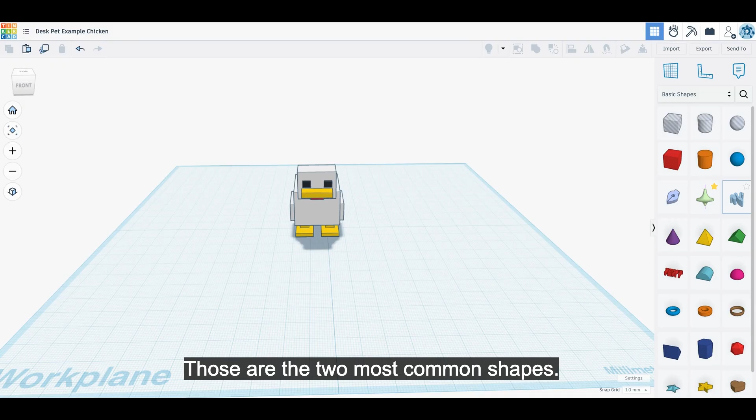I've had a few students pick other shapes from the menu and have to go back to either the sphere or the cube. But the goal of this project is to create an animal using only one shape. All you get to do is recolor and resize that shape.

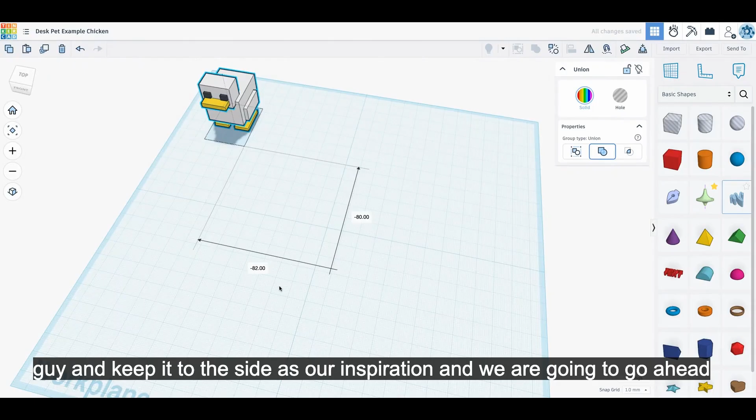And with the popularity of Minecraft and the Minecraft movie, obviously the chicken is an excellent choice for this project. So we're going to move this guy and keep it to the side as our inspiration, and we are going to go ahead and get started making our own.

Now, when we make our little desk pets here, I like to tell the students start at the bottom and work your way up. And don't forget to use things like duplicate object so that you can save yourself time in trying to make things symmetrical and perfect.

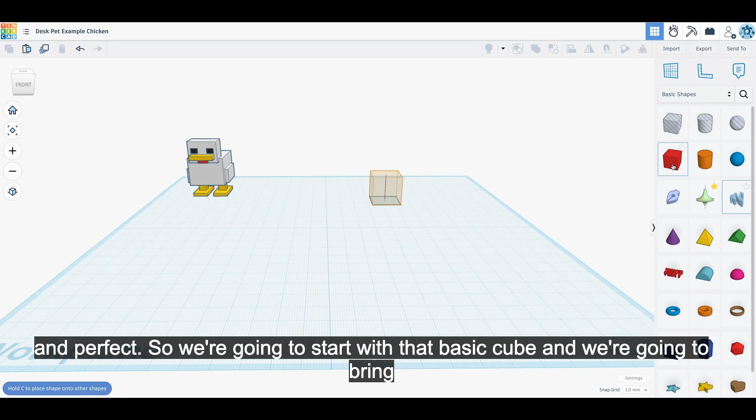So we're going to start with that basic cube and bring it on over, and we're just going to resize this. Let's make this 10 by 15, and we will make the height 2. You're not going to need much more than that. And we can make it a lovely shade of yellow.

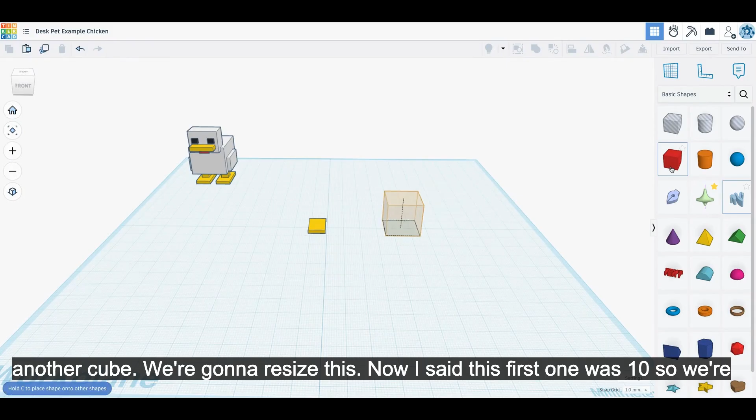Now I'm not going to duplicate this just yet because I do want to get that leg in there first. So we're going to grab another cube and resize this. Now I said this first one was 10, so we're going to make the leg 7 by 7.

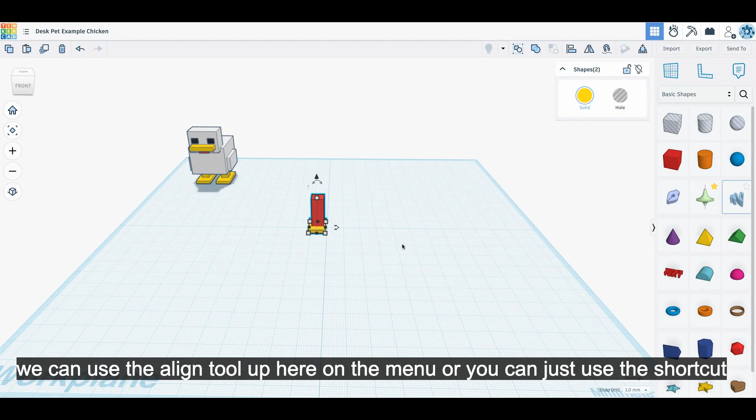And then we are going to go ahead and center these. Now, when we're aligning something, we can use the align tool up here on the menu, or you can just use the shortcut key L and it brings up your alignment tools. We're going to center, center. We are not going to use this Z center because we don't need a kneecap, we need a foot.

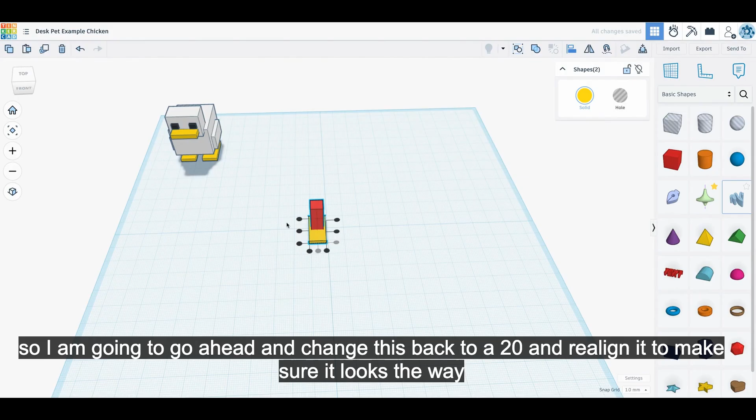We're going to double check sizes before we do anything else, and I think my foot is just a little too short for what I want it to be. So I am going to change this back to a 20 and realign it to make sure it looks the way that I want. This leg is a little chunky, so let's change those numbers to a 5. I think that's better. Realign it and make sure that I like it.

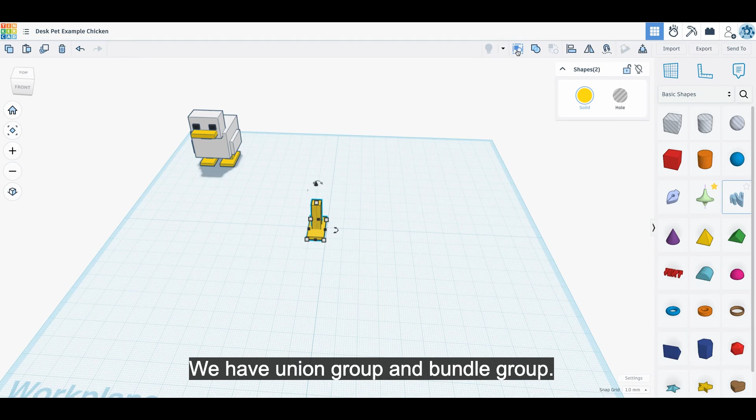Let's change that to a yellow as well, and let's go ahead and group this so that we don't mess things up. Now, we have two choices for grouping: union group and bundle group. Bundle group is kind of a temporary grouping. Union group means we want these to be one object. So we're going to union group this because the leg and the foot need to be one object. Okay, so they are now officially one thing.

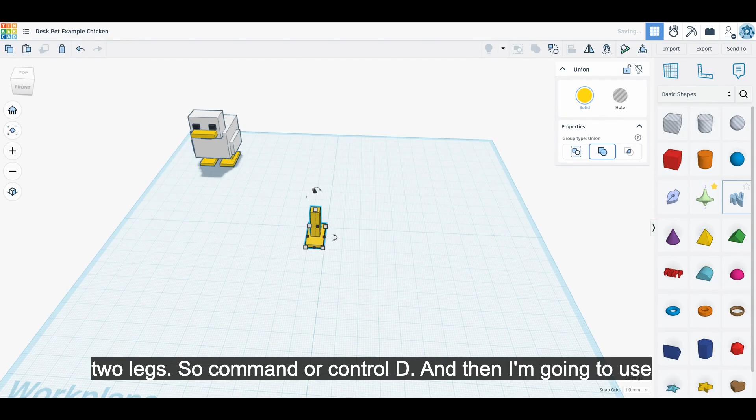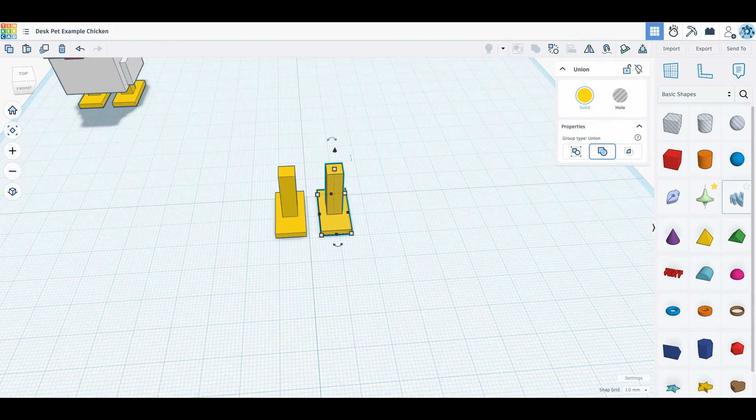I'm going to duplicate this because chickens have 2 legs, so Command or Control D, and then I'm going to use the arrow keys until they're right next to each other. Now I can tell that they're right next to each other because if they were overlapping, you would see that overlap right here in the middle. Once they're just touching, I'm going to check my snap grid. It says it's 1 millimeter. I want these 5 millimeters apart, so I'm going to tap my arrow key 5 times: 1, 2, 3, 4, 5. So there's 5 millimeters of space between the legs.

All right, I'm going to group these. Group. And now I have a pair of legs. I'm going to leave them tall like this because I want to make sure the legs are fully embedded inside my chicken. So the next step is to make that chicken body.

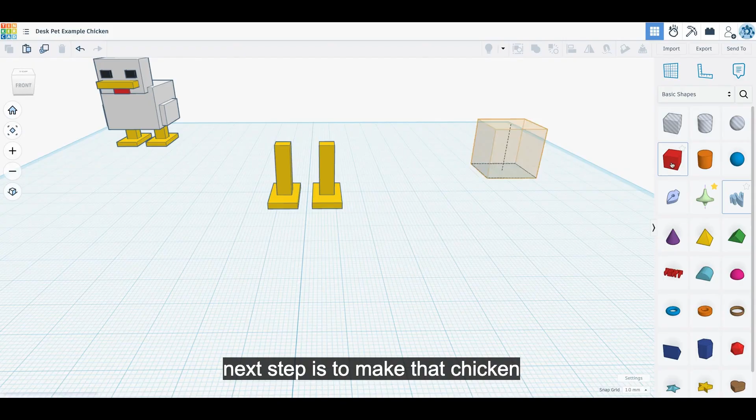New cube. Now, these are 20, so let's make this body 35, and we're going to keep it—now let's do 30. All right, and we're going to raise this 10 millimeters off the ground. 9, 10. And then let's go ahead and align these.

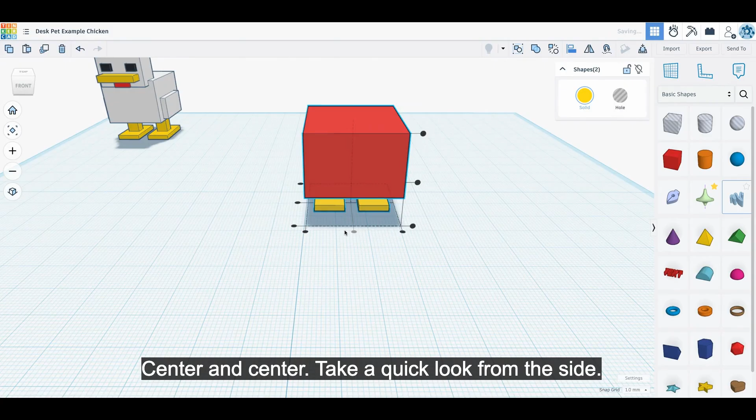Center and center. Take a quick look from the side. Looks pretty good. Now, let's see how I know that these legs are on the inside.

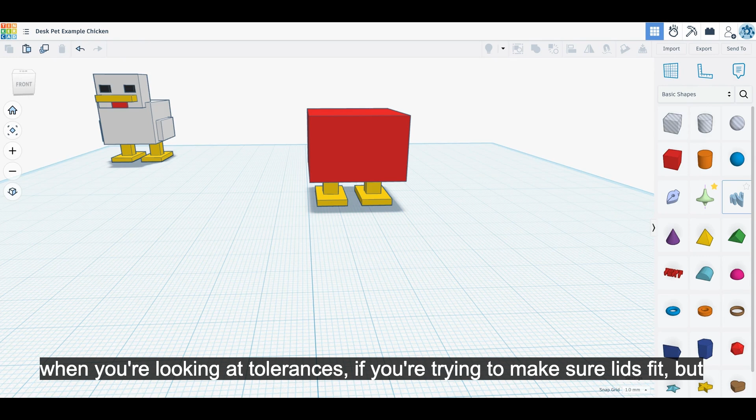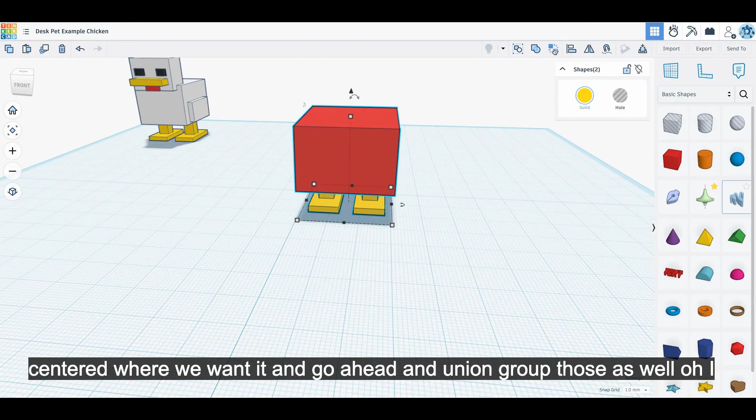There's a feature you can do called transparent, and what that does is turn a shape transparent so you can see through it. This comes in real handy when you're looking at tolerances, if you're trying to make sure lids fit, but I like to do it to make sure things are actually touching. So I'm going to click on my red cube here and tap the letter T for transparent, and here you can see that those legs are definitely inside the chicken body. Click it again, click T, and then make sure everything is still centered where we want it, and go ahead and union group those as well.

Oh, I forgot to change its color. So I'm going to click undo, click that red, and I'm going to change it to a white.

I do not want a red chicken. I want a white chicken. And then I'm going to group them together.

Now you'll notice that my legs have turned white, so I just need to go up here and turn on multicolor. And then that multicolor is back. You might have to do that step more than one time.

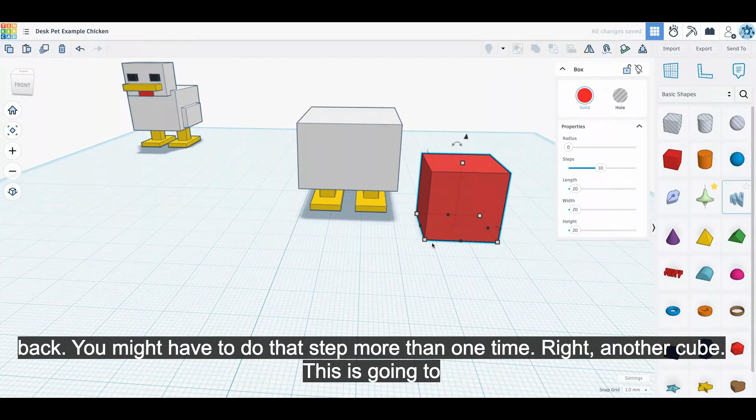All right, another cube. This is going to be for the wings, so we're going to need two of these. I'm going to get it in place and then show you a sneaky trick to make sure that it's right.

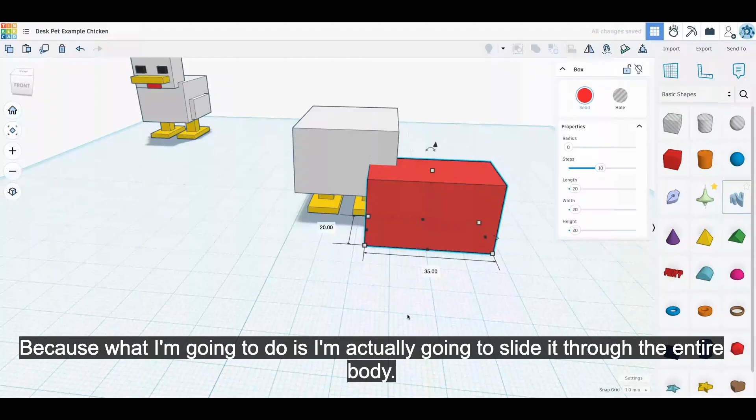So my chicken body is 30 across, right? I'm going to make this 35 across, because what I'm going to do is slide it through the entire body just to make it easier to make sure both sides look the same. I'm going to make it right now 10, and I'm going to change this one to 15 just to see how it looks.

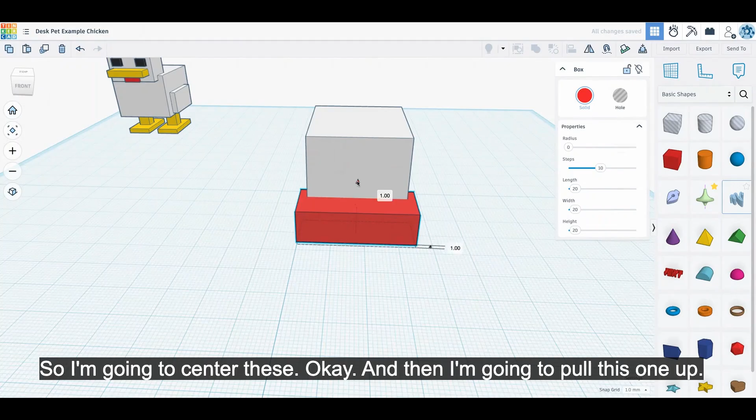So I'm going to center these. And then I'm going to pull this one up and push it. I'm using my arrow keys here because I'm trying to keep it really accurate.

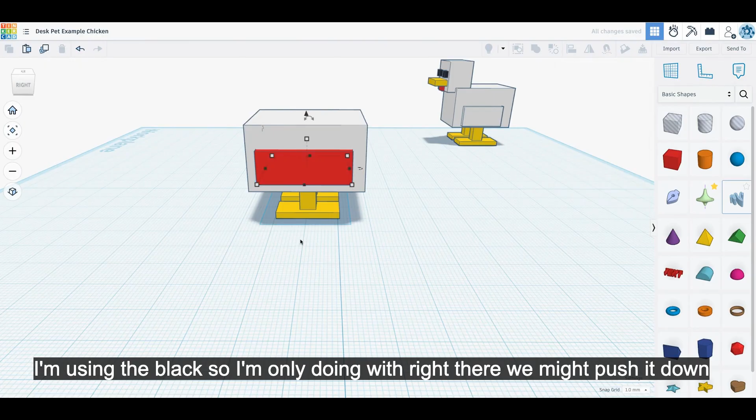Now, if you look at my original design, it's almost as long as the body. So I'm going to grab this and just pull it out a little bit. I'm using the black, so I'm only doing the width right there. I might push it down just a little bit.

And now it's the same on both sides, and I don't have to worry about duplicating anything or using the measuring tool. I just created the box to go all the way through so that everything is lined up the way it's supposed to be.

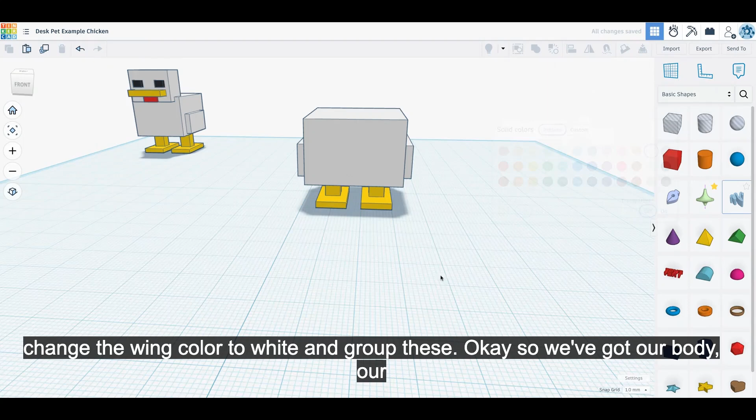I'm going to change the wing color to white and group these. Okay, so we've got our body, our legs, and our wings.

Next step, head. So we're going to grab another cube. I'm going to leave this one alone, I think, except to shrink it down a little bit. Let's make it 15, and then let's make this 15.

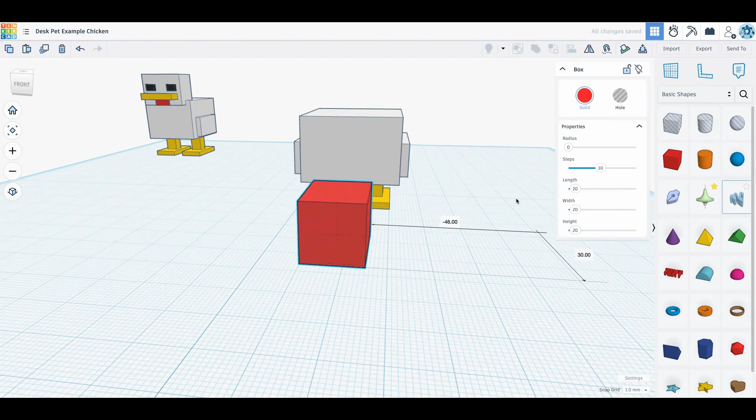All right, you know the drill, kind of smush it in a little bit. Notice that it's kind of smooshed in, and then we are going to lift it up until we get it where we like it. The important thing is to make sure that it's got some shoulder.

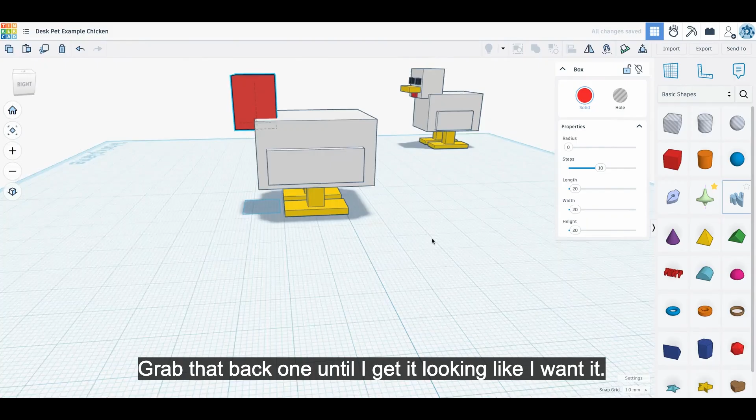Now, this is definitely way too wide. So I'm going to push it back a little bit, grab that back one till I get it looking like I want it. Oof, definitely needs to be wider.

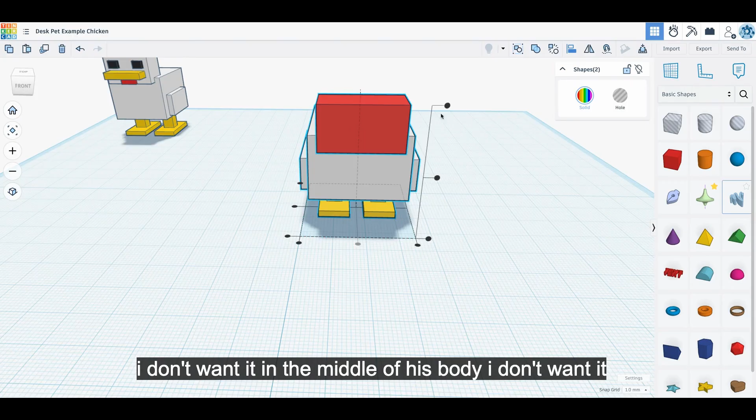I'm going to center it because the chicken's head needs to be centered, but I'm only going to use this centering dot in the front. I don't want it in the middle of his body. I don't want it, right? So we want it just right there.

And we want it sticking out a little bit. I like where that is. So again, change that color to white. And you'll notice that I'm grouping after every step. That is because I don't want to accidentally move something.

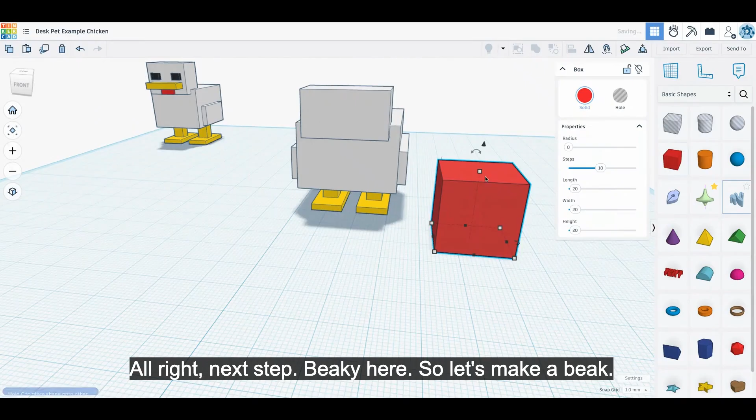All right, next step, beaky here. So let's make a beak. I'm gonna squish it down just a little bit, and squish it this way a little bit. Gonna lift it up, pull it over.

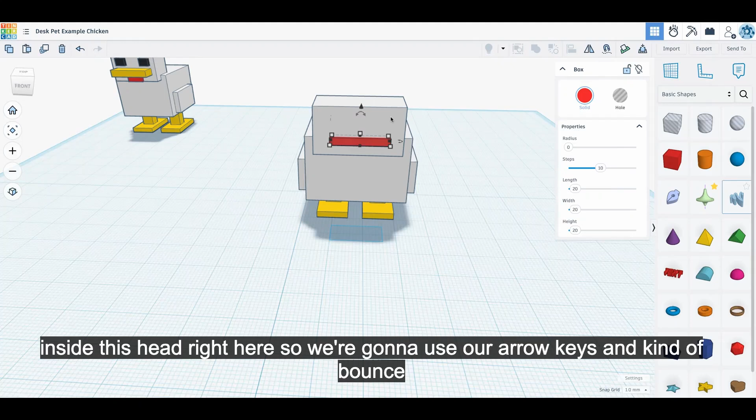Oh, do you see how it looks like you can't see it anymore? It's glitchy. That's because it's tucked inside this head right here. So we're gonna use our arrow keys and kind of bounce it out just a little bit, and then center it, just using this front center one.

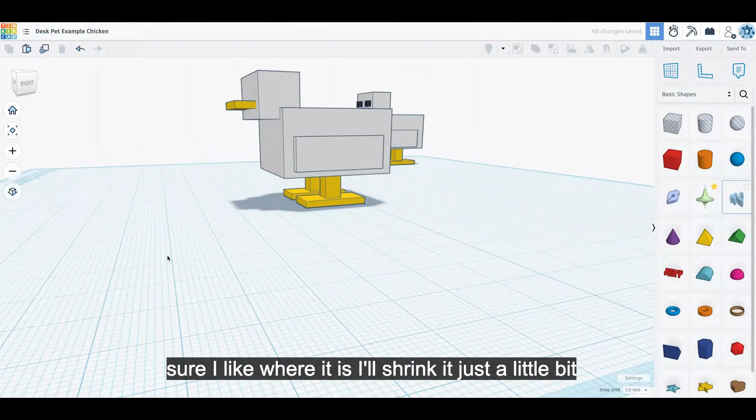Change the color to yellow. And before I group it, check it from the side to make sure I like where it is. Gonna shrink it just a little bit. There, kind of looks like it should. All right, group that.

Now it's got this weird red thing, the wattle, I believe is what it's called. It's just a tiny little cube. So I'm going to hold the shift key and click and drag so that it shrinks all the proportions at the same time, and just make a 5mm cube. Grab that triangle to bring it up.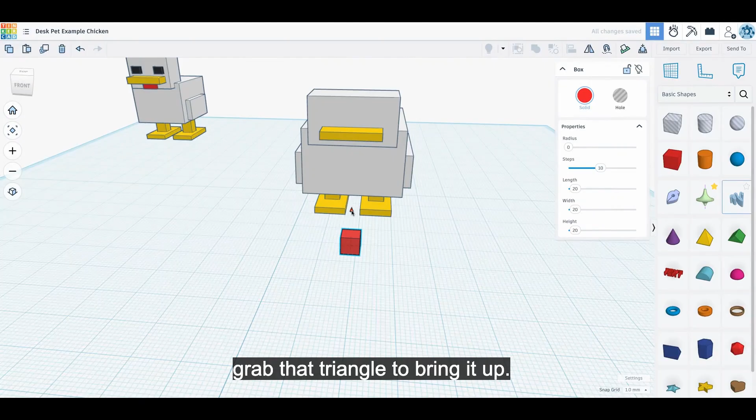And then I'm going to use my arrow keys to push it back. It's hanging out a little bit too much, not a big fan. Let's see if that looks like it's not centered, so doing our centering. There we go, looks pretty good.

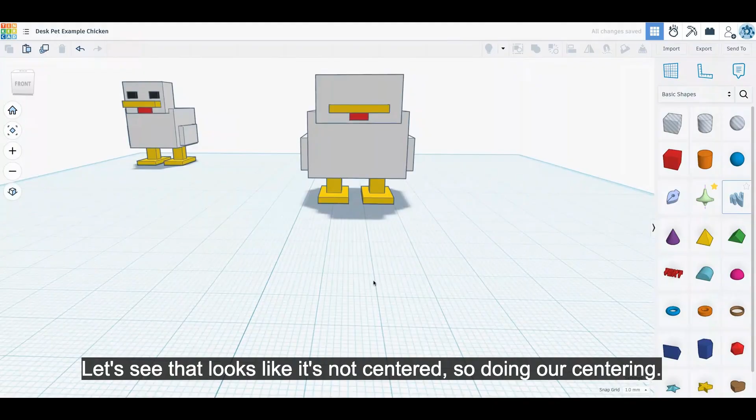Can't have a chicken without eyeballs. So hold that shift key, click the top one, pull it all the way down. Change that color to black.

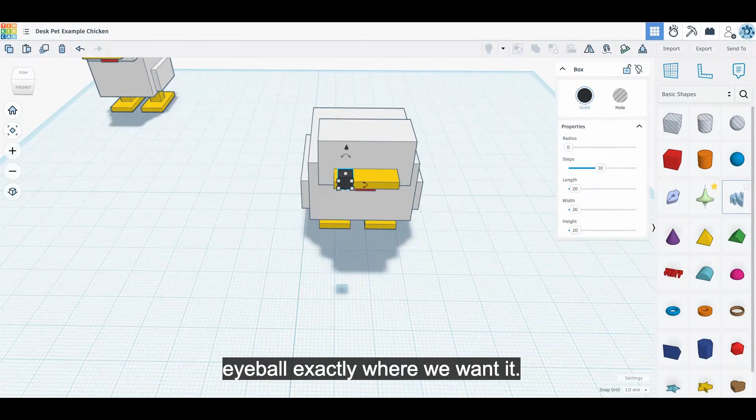Now this is where we're going to use duplicate again, because we are going to get this eyeball exactly where we want it, and we don't want to worry about trying to get these things lined up later. We're going to get one eyeball where we want it, press Control D for duplicate, and then we're just going to use the arrow keys and push it right over. And here we have, and group it up.

A cubed chicken, or a chicken jockey if you are a Minecraft fan. Not quite twins, but that'll do.